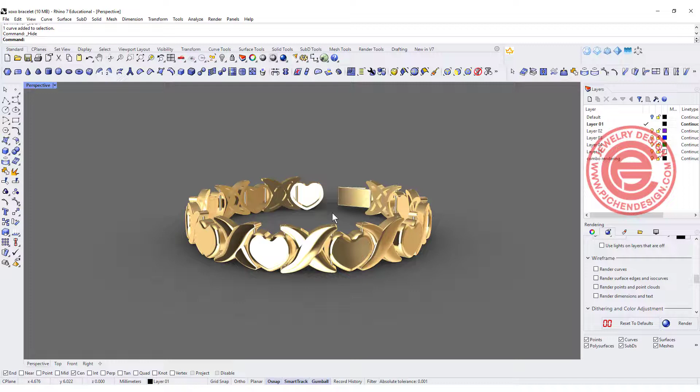Today we'd like to talk about how to make this XOXO bracelet and how to set it up for the hinge. Are you ready? Let's get started.

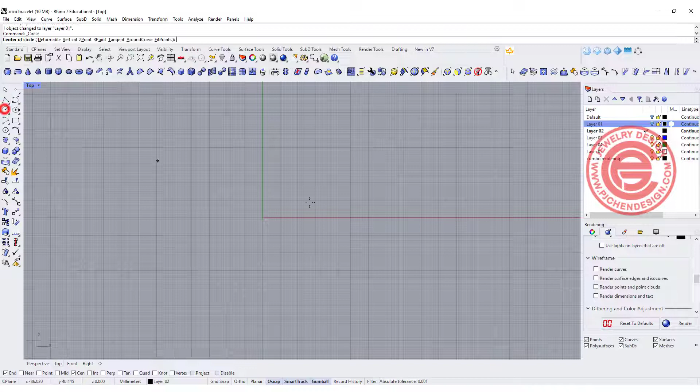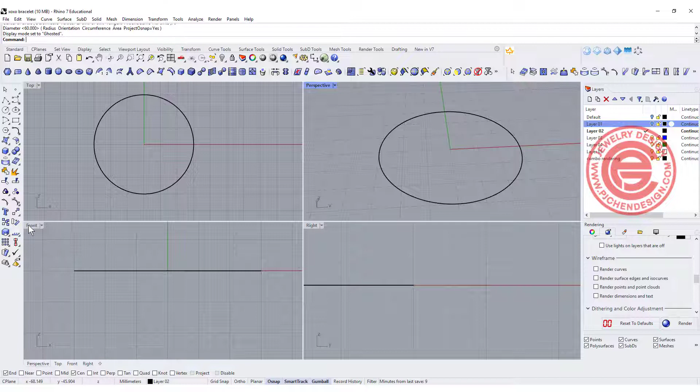So I'm going to come to the top view and draw a reference circle for what the end product size is going to be. I'll try a diameter of 60, which is a standard size for any bracelet. You can make it longer or shorter, but this is about the size we'd like to have, and from there you can model accordingly so it won't get too big or too small.

Let's start with our first element by giving a reference again. I'd like to snap right in the middle and see how big of a size I need. It could be really square by just holding shift for that X element, or it could be a rectangular shape, depending on what you like to do. So I'm going to do the square, and roughly it's about a little bit over 10 millimeters.

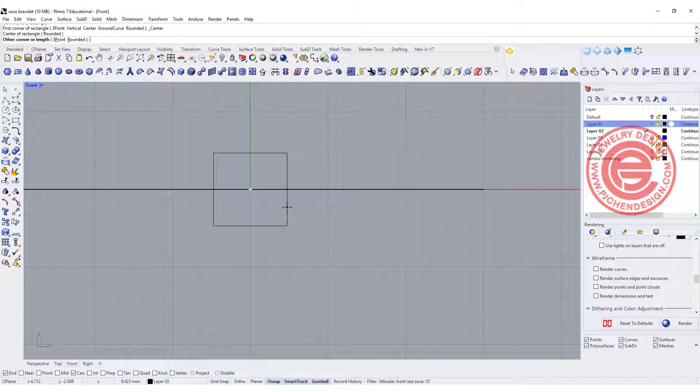I'm going to draw a mark right here from this point to this point. This is a reference for us, and if I have a circle or the other element, it will probably go from here to here. So this is where we want to draw the heart.

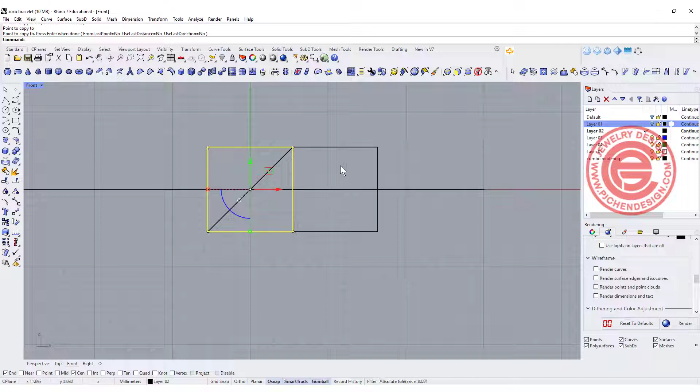So let's go ahead and draw the heart first. I'm going to use the curve, snapping into this endpoint and following with my near snap, following the shape. In the middle, we want it dipping a little bit like this. You can adjust it however you want the shape of the heart.

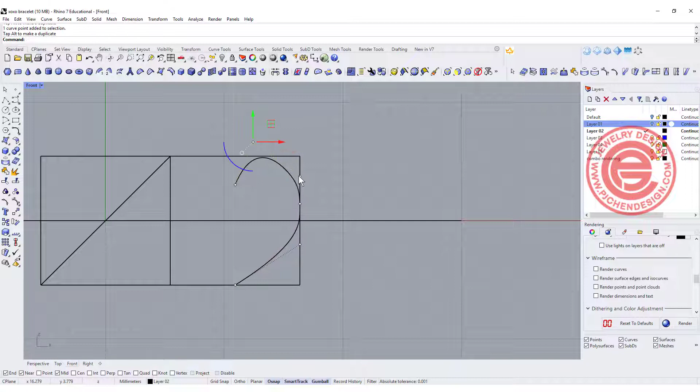This might be a bit too pointed, and we can adjust it later. This might be a little too pointed, so maybe I need one more point right there. So I'll go ahead and add one more control point, so I can edit this without changing too much of the steep curve.

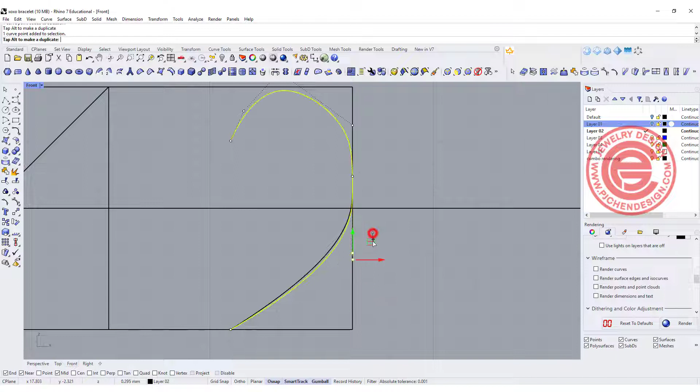Play around to find the shape that you like. We might still need to change it later because it actually needs to fit into the X shape there. All right, so that's one of it.

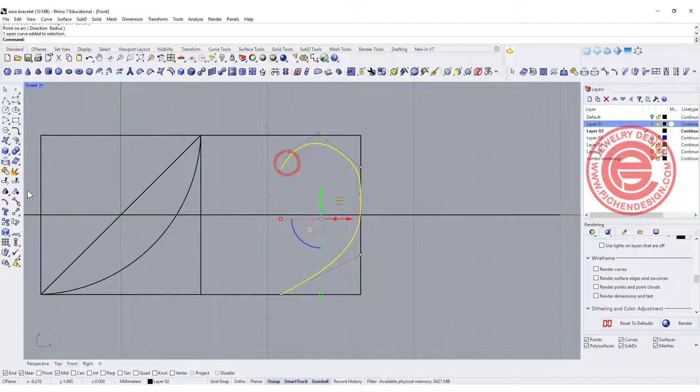For the shape right here, I'm just going to draw an arc, maybe go from here to here, something that looks like this. Actually I should draw on the other side, but that's just simply mirrored to the other side. Let me join this one as well.

Think about it: if we have this heart and it has to fit in there, it's kind of blocking the middle, so you won't get a nice fit there. So we need to adjust this one as well. We're going to rebuild this curve.

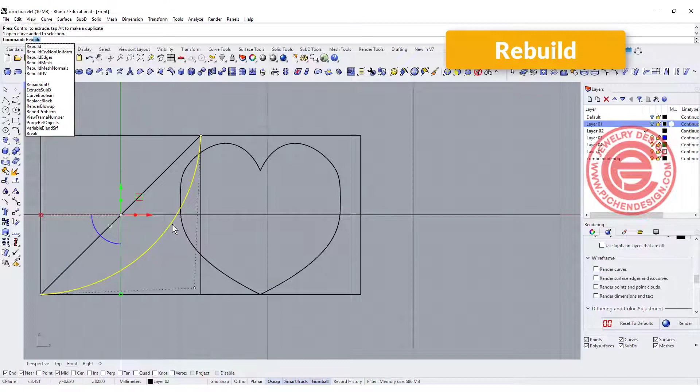We're going to rebuild into the 7 count, and now that we have those points, we can move them around something like this. So we'll still have the bump on the bottom, but it's kind of caving over there, which will be easier to fit in. This shape may not look as good though.

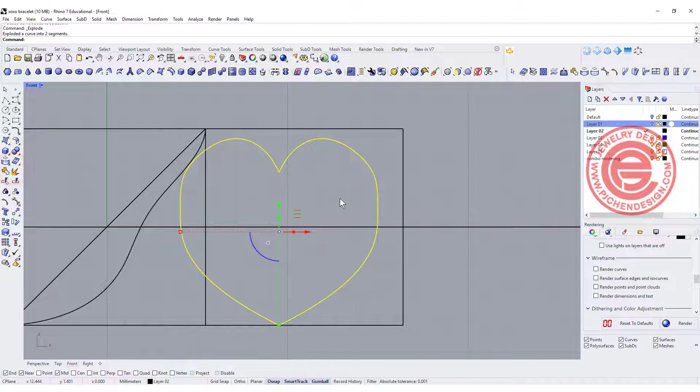Let me actually delete on the other side. We just need to find the best fit here. Maybe I want this one to be lower.

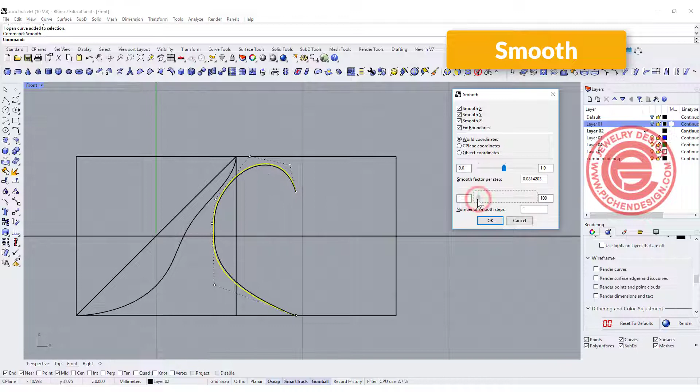And maybe I want to use a smooth command to make it a little bit rounder, like this. Okay, so we're going to do another test to see if that fits.

I'm going to rotate it and make sure copy equals yes, and rotate it 180 degrees to get our first element right there. Let's go ahead and join it.

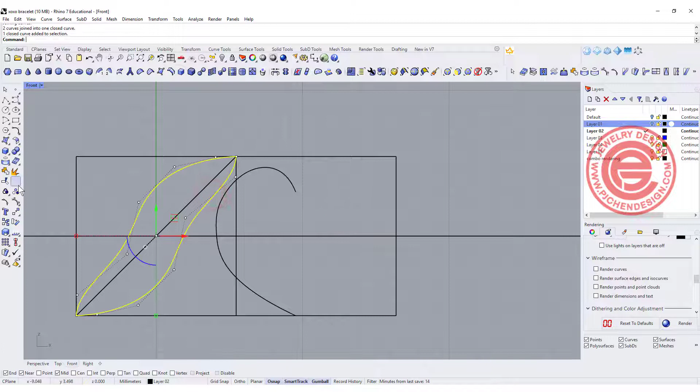We also want to round the edges a little bit, so let me round it with 0.5 millimeter here and 0.5 millimeter here. We're going to do another test to see if that heart is going to fit really well.

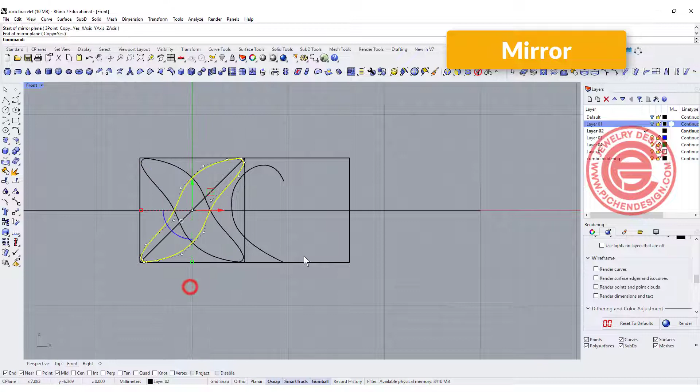So let's go do the mirror and bring it over here. Thinking about it, we're going to have a pin go through, and the pin will possibly be right there, so the heart needs to get in a little bit more.

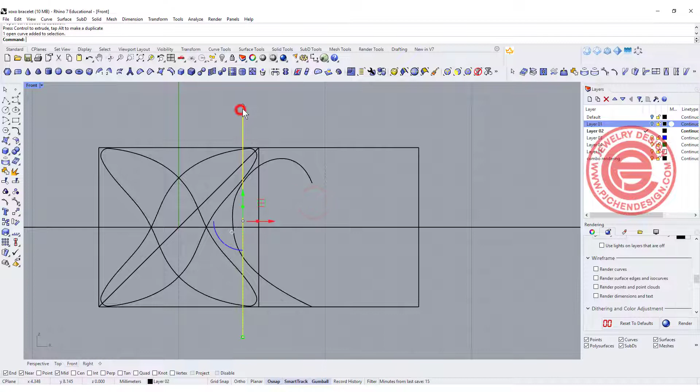So something like this will be the end. The pin itself, you might want to think about 0.7 millimeter. So let's give it a reference line. I'm going to have this line and offset for 0.4 millimeter. That will be the hole size, and also offset on the other side. And then let's just group those pieces.

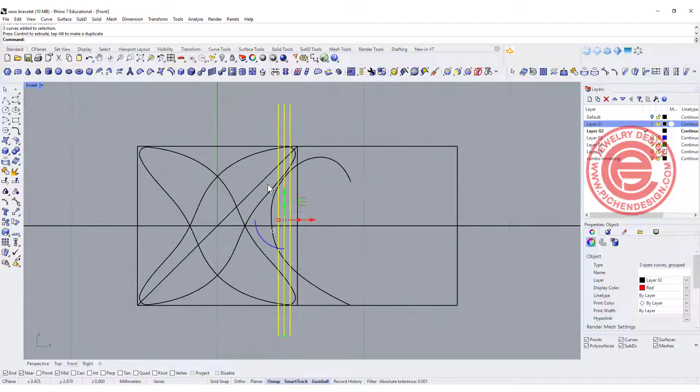All right. So let's change it into the red color, so it gives us an idea. Now this line might be too thin over there, so I might need to move it out here, but you do not want it to be too thin over there either. So maybe what we need to do on this one is the heart needs to move in a little bit more. By moving a little bit more, and this one we can move it here too.

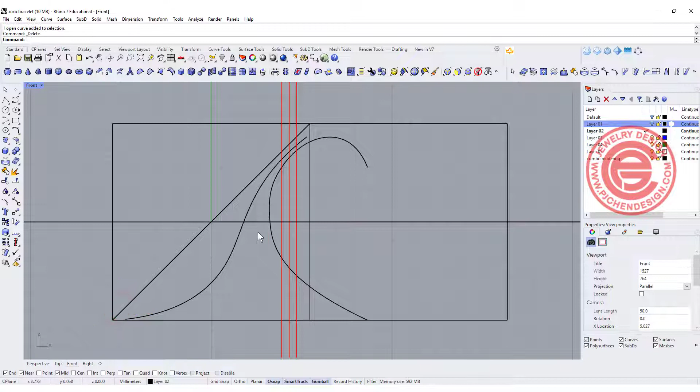You kind of see it's blocking there, so we will need to have this line move in even more like this. Okay, so now we got everything correct. The bottom one doesn't need to be moved. Let's delete this one, explode this one. Let's go ahead and delete those. And again, we want to use this one to rotate it with copy equal yes and flip it here.

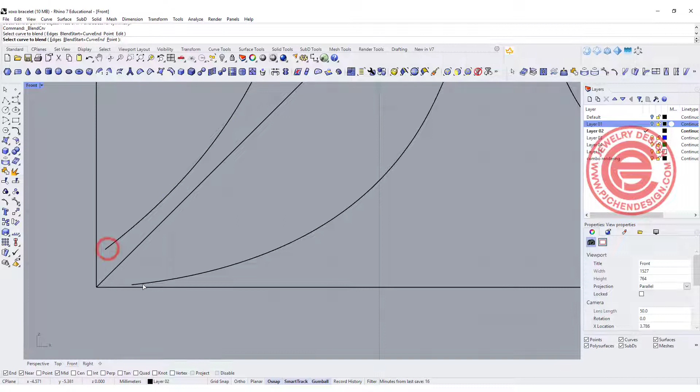All right, and now this one won't block. I can simply just blend the curve in between here and here, and also in between here and here. All right, so now this is a better fit there. Let's go ahead and use the mirror, and we want to mirror from here to here. All right, double make sure that will fit.

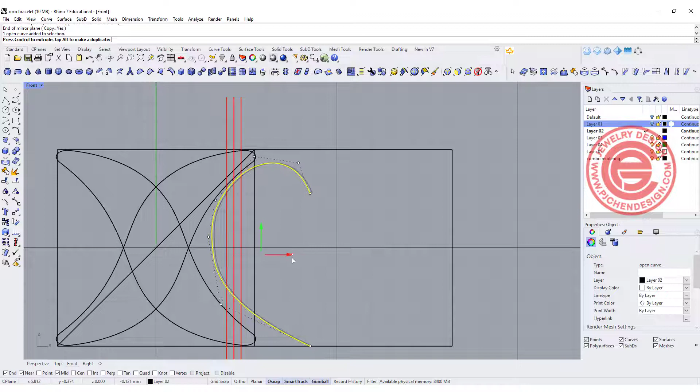Right, so you want to make sure that you have enough metal. You do not want this hanging outside too much. You also need to leave a little bit of space right here, because the space right here allows it to bend, right? So you cannot have it 100% touching like this. Then your pin probably will break easily.

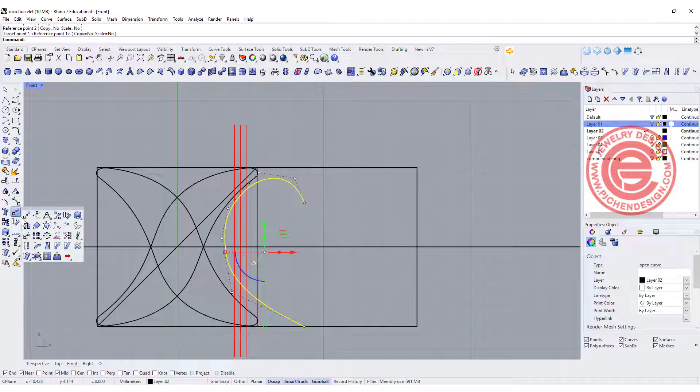Okay, so now while we have this, let's go ahead and finish the heart. We want this heart to be mirrored to the other side, starting from here to here. And we want to give filleted edges here. On the top, I might want to try 0.5 millimeter. On the bottom here, let's try something bigger, maybe 2, to get it really nice and rounded on the bottom. Okay, so now this is our basic shape. We can create the solid for it.

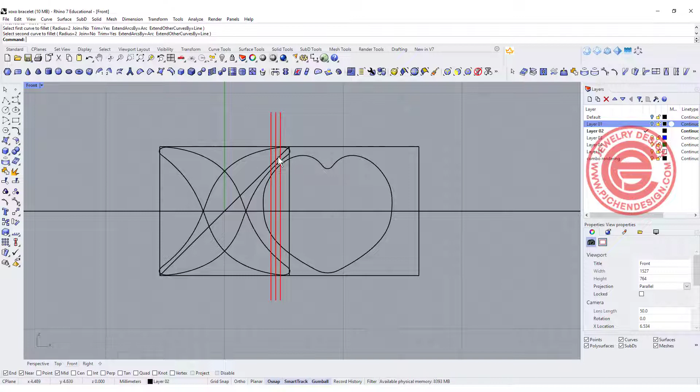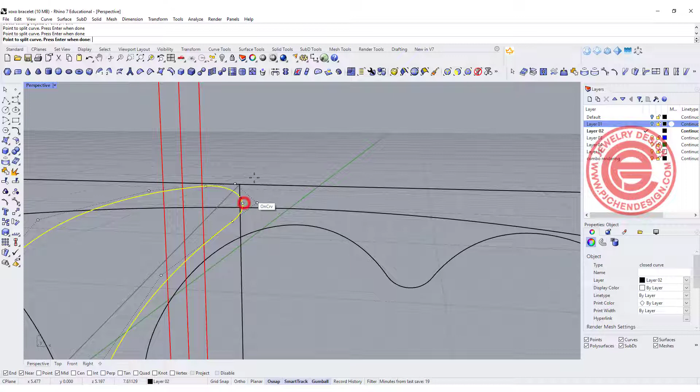All right, so to make this into a perfect solid, I'm going to split with the point roughly about here, another one roughly about here. Okay, and so now we got our two rails here. We need to create the cross section. I'm going to use the arc tool and snap roughly about here and here. Then you want to come into the top view, holding the shift, so then you get this really bumpy shape here.

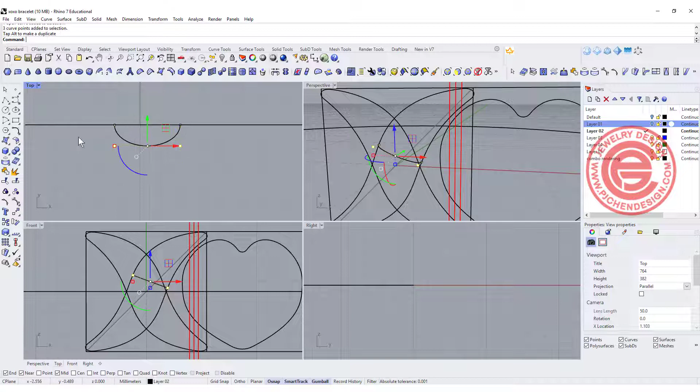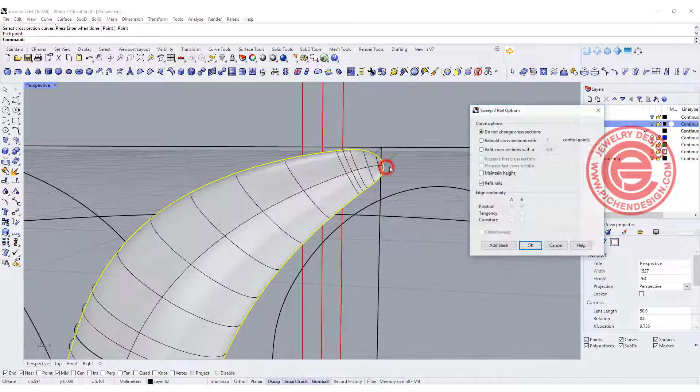Now if this is too tall for you, you can always go a little bit lower by dragging those 3 control points and moving them down. All right, so that's creating the surface. We are going to use the sweep 2 rails, rail 1, rail 2, and you got the endpoint right here. And then you pick up this cross section and you click on the point again and come into this endpoint. All right, so that's how you get this one, right?

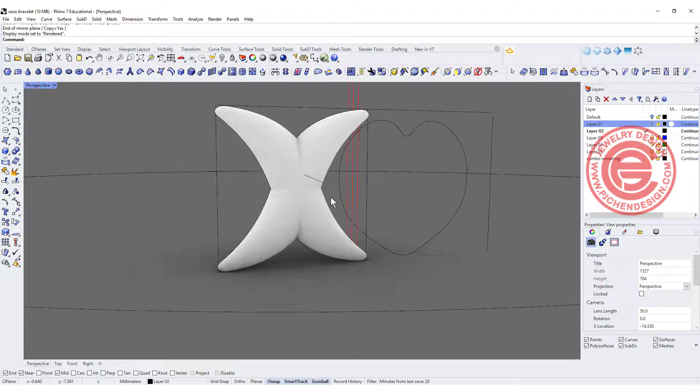Now we have this surface and we want to mirror this one to the other side, and it's going to be like this, right? Now notice that two of them are the same height. So if you look at the render view, it's going to look like this. It's pretty ugly. So one of them we are going to make a little bit lower by using 1D scale. So I'm going to snap any point and just bring it down a little bit like this. So you will have this X shape there. So we're going to pick up the curve back and let's join it.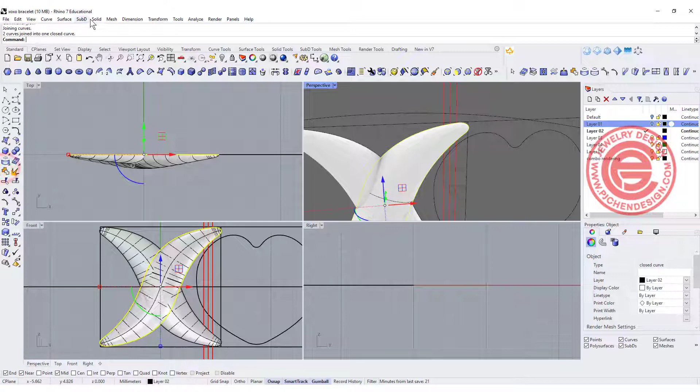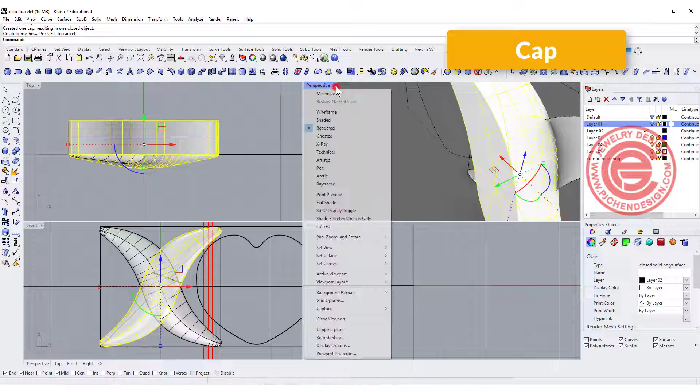And because we need to make it into a solid, I'm going to use the surface command extrude curve straight, and set how tall you want it to be. So roughly it's about 2.5 millimeter. I'm going to set the height over there. So now we have this one. Let's go ahead and join those two surfaces and use the command cap to close it. So now this one is a solid, right?

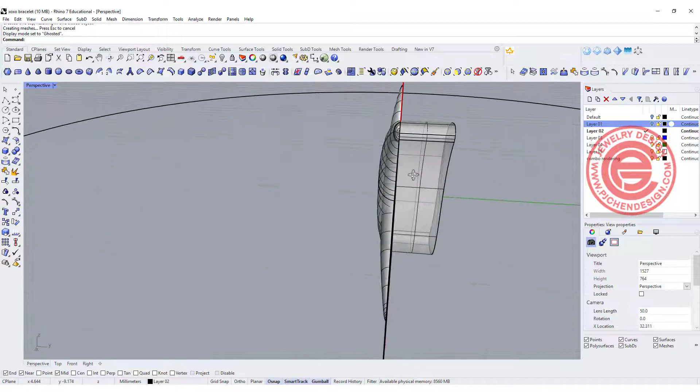But if it is a bracelet and it is solid and it is gold, it's going to cost you a lot of money, and it's pretty heavy. When it is heavy, it tends to flip while you're wearing it. So we actually need to make it hollow. Two ways you can make it hollow. One, you can use the shell command, but this might be too tight because of this tiny radius there. Let's give it a try. We want to use the shell command, and we want to keep the wall thickness at maybe 0.7 millimeter, and then I click on this base. All right.

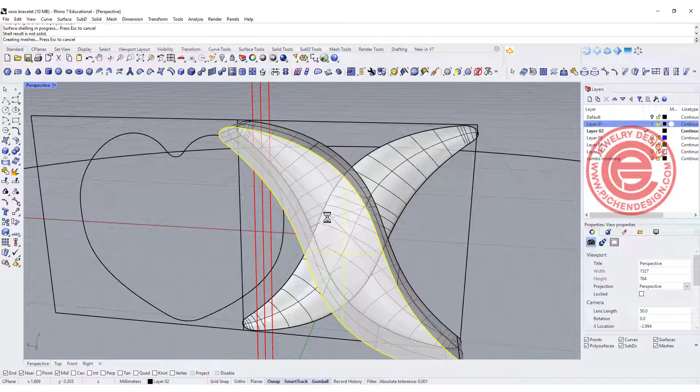So as you can see, the result is not solid like what I say. Maybe this is too tight there. All right. To solve this issue, what we can do is we can create this solid, and just scale it 3D down, and then tilt it a little bit and make it longer, for example, coming out like this, and then you can Boolean difference.

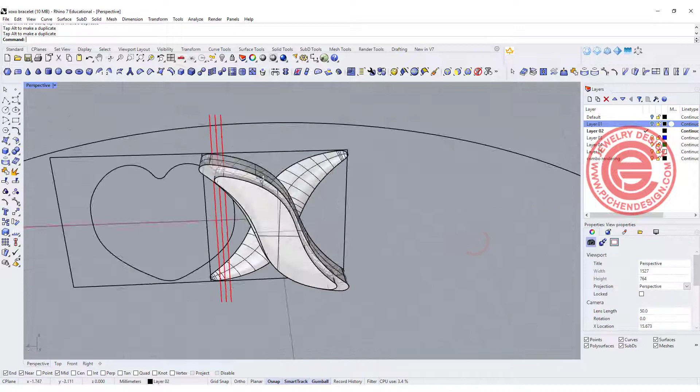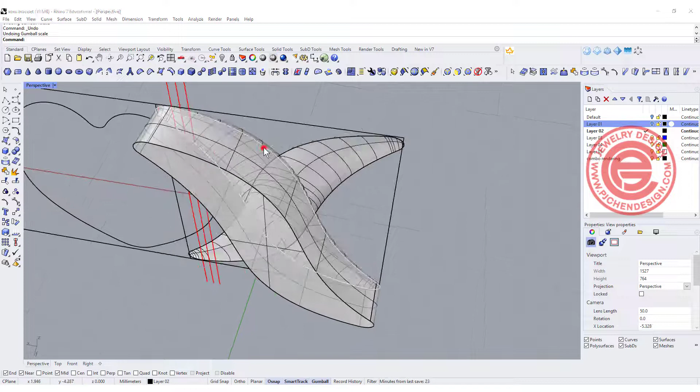But in that case, you can see the thickness in between the outer and the inside is not consistent, right? It keeps the shape there, but it's not consistent all the way. I don't like it. All right, so the way I think it's better to do is we are going to pick up this curve over there, and I'm actually going to offset for the certain thickness I want. So I'm gonna stay with the 0.7 millimeter for the interior.

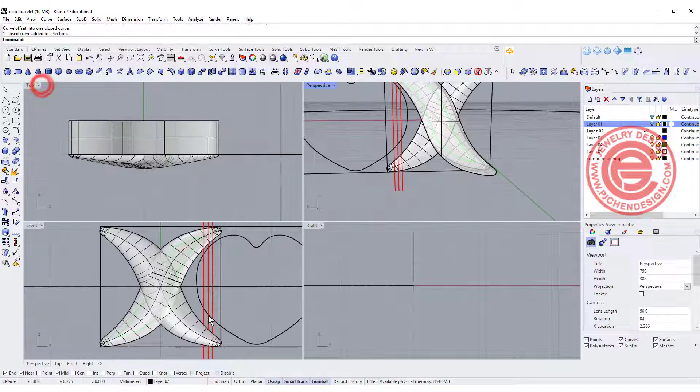So once we get this one, let me turn it into the green color here. So now that green line over there is what we are going to extrude. But look at this, maybe red line is easier to see. So look at this line, it's so sharp. Anything that you want to consider casting, you want to avoid the sharp point. So we are going to give it a fillet. For something small, let's try 0.3 here.

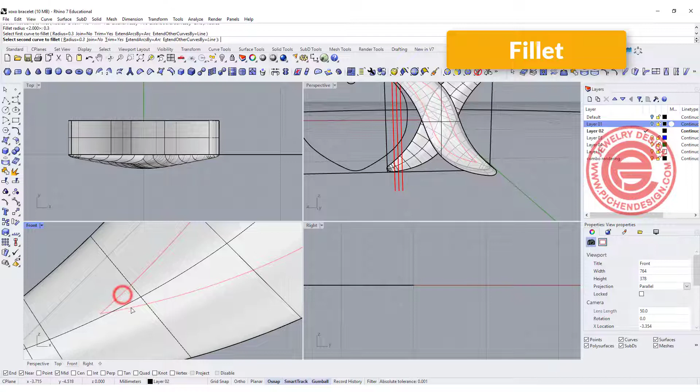So round it over there. And we want to do 0.3 as well. So round it over there. It's also good for us to do it this way, because that completely avoids this area that we are going to punch the hole, and so that will make it more solid over there structure-wise.

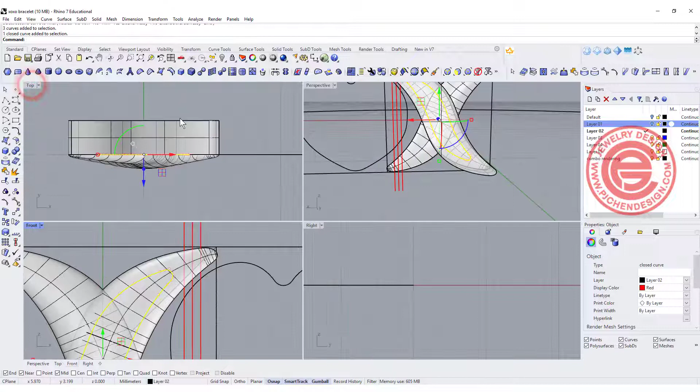All right, so this one I'm just going to extrude it straight with the solid, and now I have something like this. Let's give it a try. Boolean difference, this guy out of this guy. All right, so see, nice and beautiful and even, and we have a very solid over here. Okay, so now we are going to do the same thing to the other side.

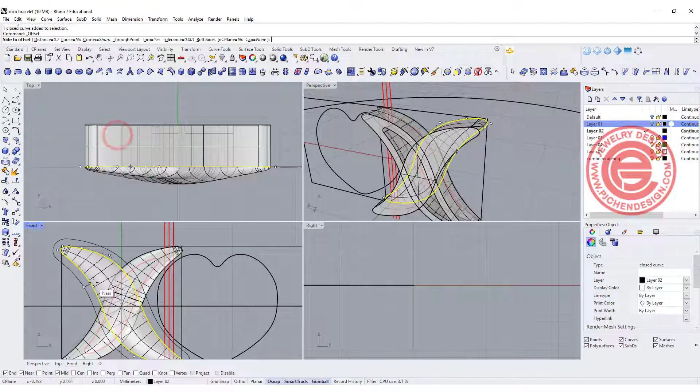Let's pick up the curve over here, and let's go ahead to surface, extrude curve straight for the same height, 2 millimeter, and then join them. After that, use the cap command to make it solid, and then we need to cut out the middle part. So pick up the original curve, offset for 0.7 millimeter. At the same time, we are going to round off this corner and this corner.

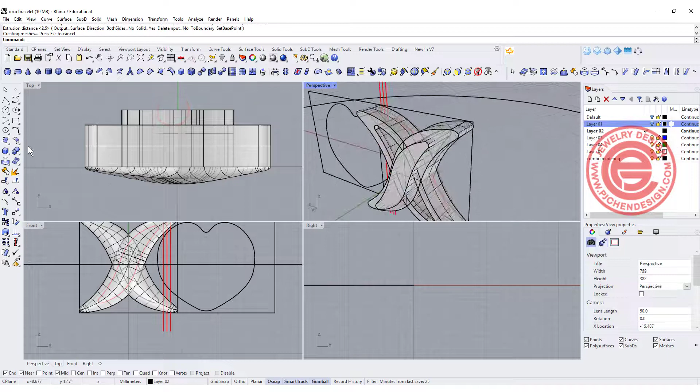Okay, so with the new curve that we have, go ahead to extrude planar curve straight. So now you're going to use the Boolean difference, this one and this one. All right, so now I'm looking at this. You can Boolean split this one out if you want to. For the demonstration, I'm going to just leave it there.

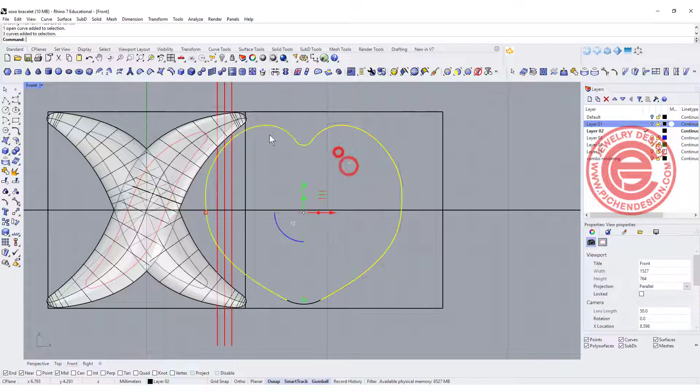Let's talk about the heart here. So now to make the heart, I'm going to just pick up all this heart curve here and join together. Simply just extrude them. So I'm gonna go to solid, extrude planar curve, go maybe a little bit taller, and actually I want to move it down a little bit like this, so they are roughly the same height.

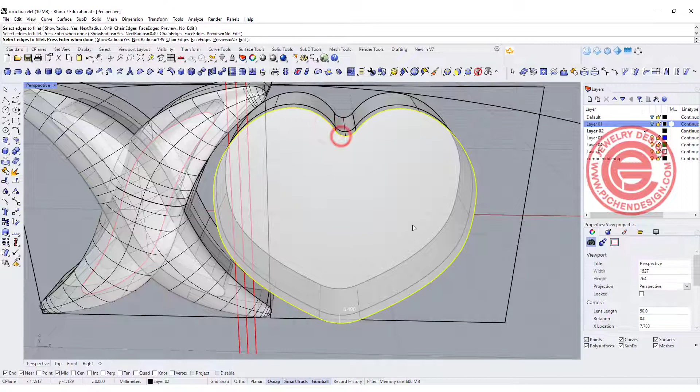And then remember, this one is like 0.5 millimeter, so I might be okay to get away with just smaller than 0.5 millimeter there for the fillet edges. So I'm going to try 0.49 millimeter, and let's try 0.49 for all of this. Okay, pretty. And we are going to use a shell command on this one to see if that works.

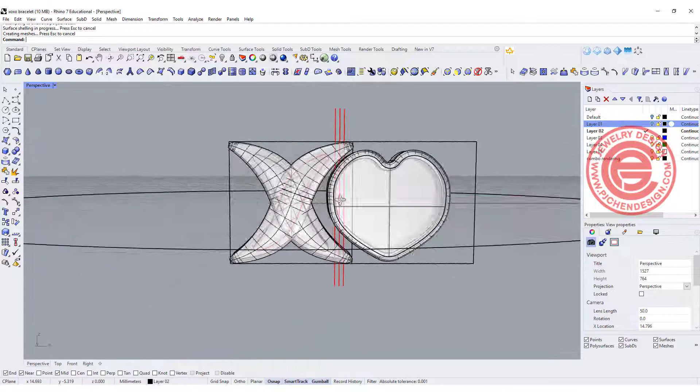If not, we can always go back with the same way, because this doesn't have a really tight area, so this one worked better. Now I'm looking at it, my heart is a little bit shaky on the side, but that's okay for this demonstration. Okay, so now we have this. We need to punch the hole there.

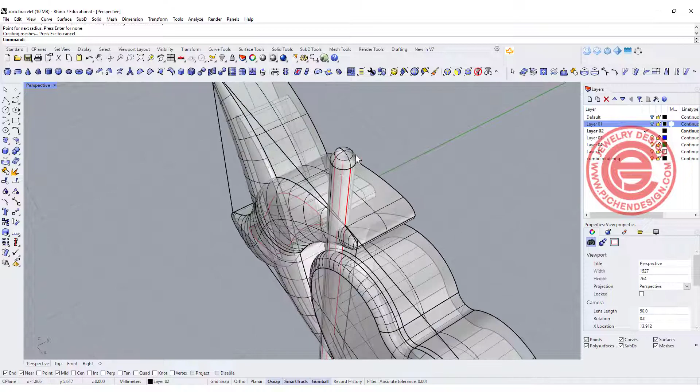I'm simply just going to ungroup those guys, and then one of them, I'm going to pipe it. The radius for 0.4 millimeter. That's roughly about 20 gauge wire there. This is going to punch the hole, and the wire itself is going to be 0.7 millimeter, just a little bit smaller. All right, so I'm going to move this one lower, roughly right in the center like this.

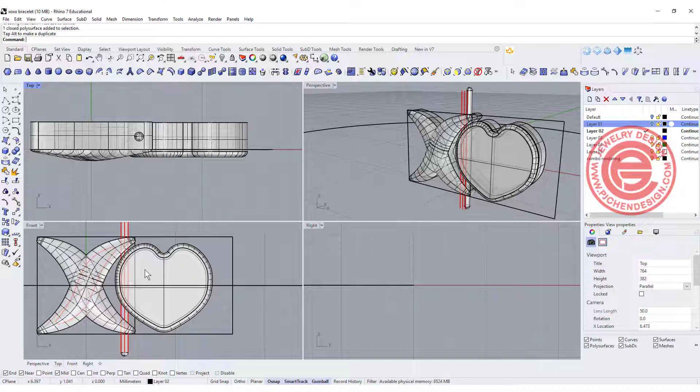And if you want the hole to be a little bit bigger, so you can put in the 20 gauge wire, that will be fine too. All right, so now after fine-tuning this one, for the rendering, I do need a pin there, so I'm gonna make a copy and hide one of them first. So I'm going to use a Boolean split, and we are going to have this one be split by this one and this one.

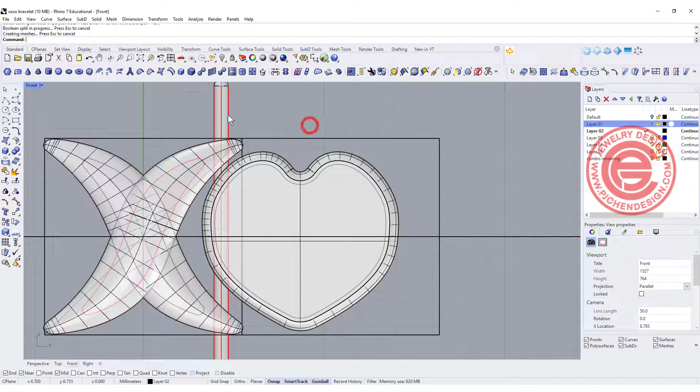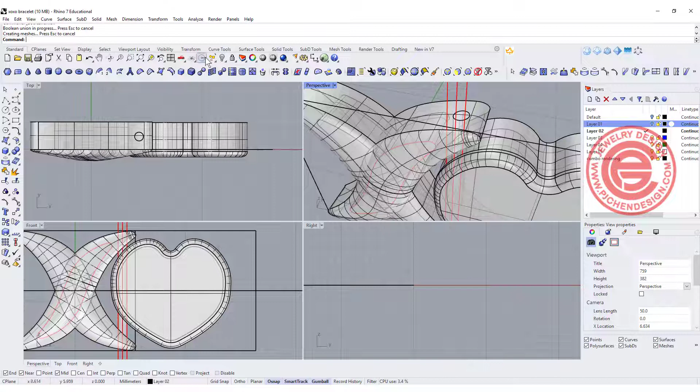Okay, so I can get rid of this one here, and we're actually going to join this and this together. Oh, I'm sorry, going to Boolean union back. All right, so that way we'll have a pin there. I'm going to turn it on. The original one, let me turn this into the red color.

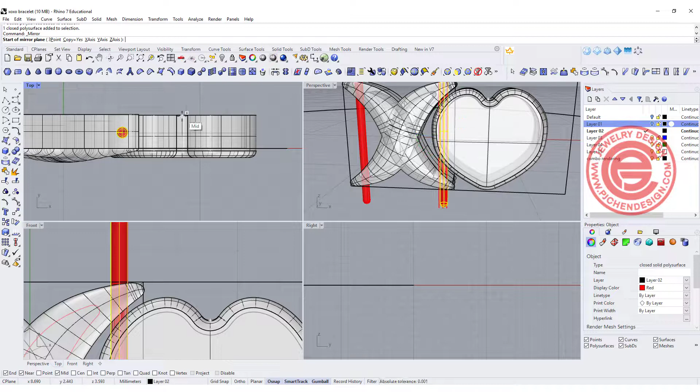All right, so for punching the hole, we need to have this one on the other side. So let's go ahead and mirror that one with the center there, so that way we can punch the hole. We also need the hole punching on the other side of the heart, so I'm going to mirror with the midpoint right here, and then that will be the hole we are going to punch on those two elements.

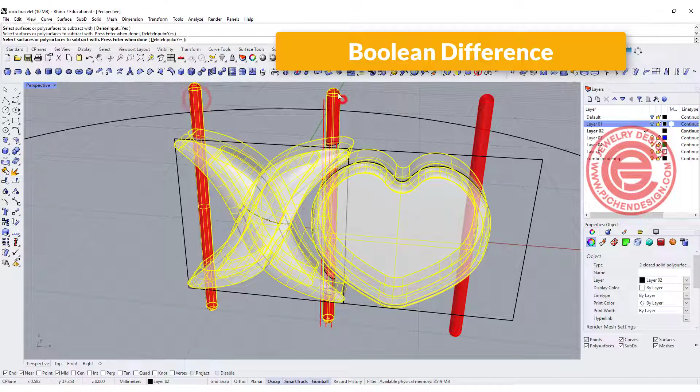So first of all, let me Boolean this one first. And the second thing is we are going to use those two and Boolean difference out of those bars. All right, so now you see we have the hole punching. The guy over here was the pin that we have. Now I'm going to turn this one into the red color.

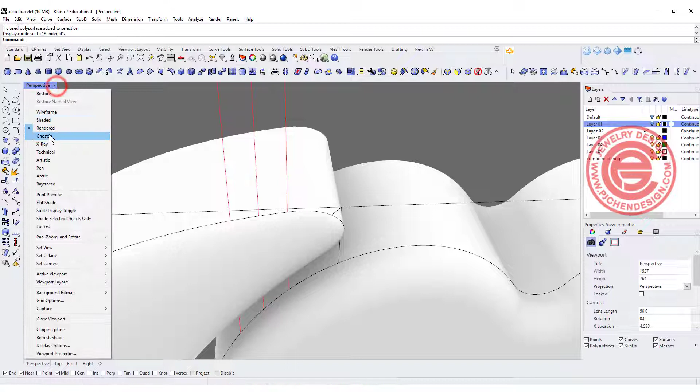And for the better rendering, if you see the rendering like this, it's like nothing there, right? So to make the rendering better, you actually can chamfer or fillet the edges. And we want something small, like 0.1 millimeter on the edge of the rod that is going in there. So now if you take a look at the render view, you're going to see it feel like there's something in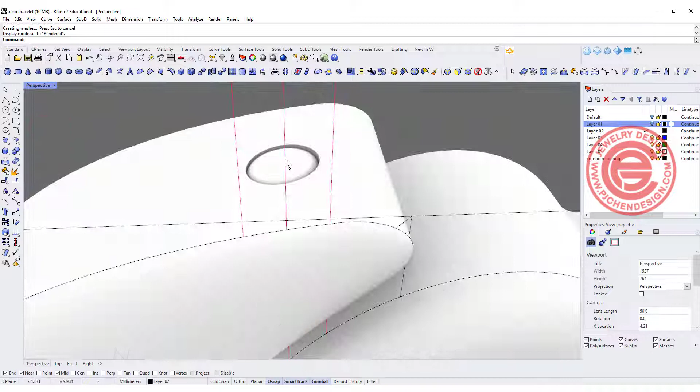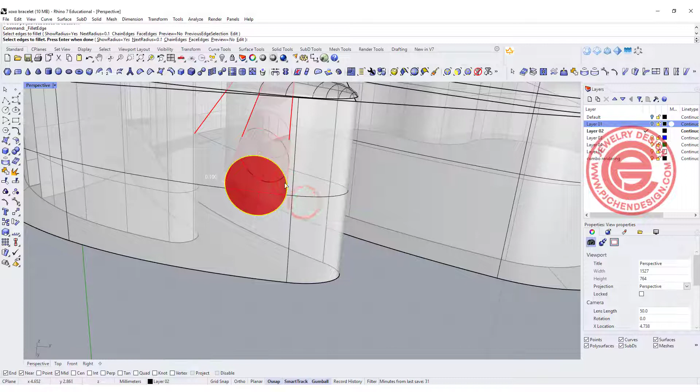there. If you want it to look nicer, you can even fillet the edges on this one as well. So in the rendering, it will look like there's a pin there. So we're going to do that on these edges as well, and also the other edges, so they both have the fillet there. Let's do here.

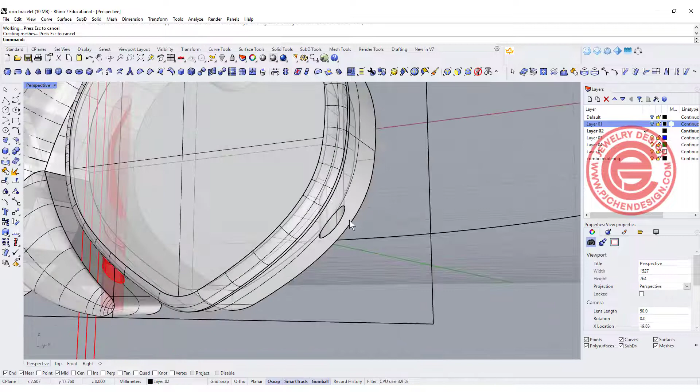Some people will ask me, do you actually need to do the fillet on a lot of things? Ideally, yes, because it will just look better on the render. But if the render is not the main thing you are doing, you just want a casting, and this fillet is tiny, it actually doesn't make much of a difference on the casting. So no, in that case, you don't. But if the fillet is part of the design, then yes, you need to do that.

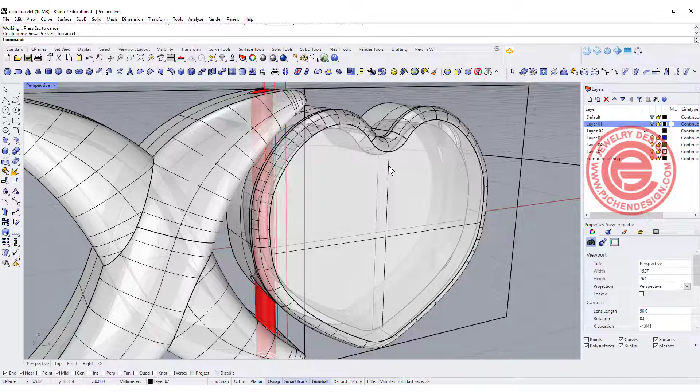It's like this puffy look, the big fillet there. It's hard to have a jeweler shape them all in the same way. So in that case, yes, you need to fillet that. I hope that explains some of the questions that you may have.

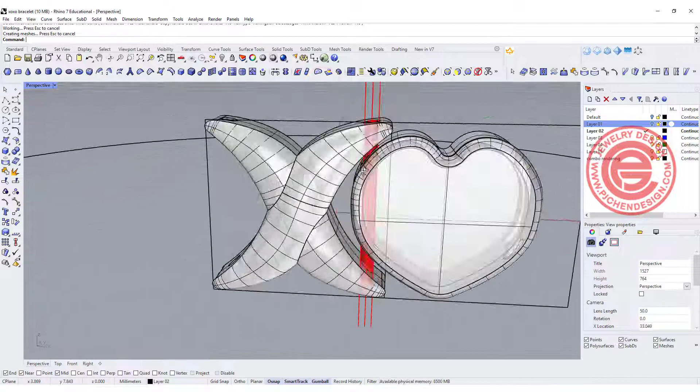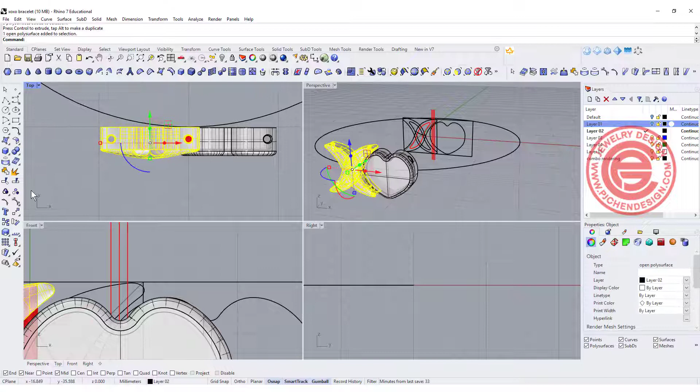All right, so now if you are going to stop here and cast, that will be fine. But if you are going to do the rendering, you probably need to have them flow into this one nicely. So what we want to do is pick up this element right there, and bring it to the front. And you might want to angle it. So I'm going to angle it something like this, move with copy equal no, and rotate it like this way. And before I rotate the other one, I need to mirror the pin there.

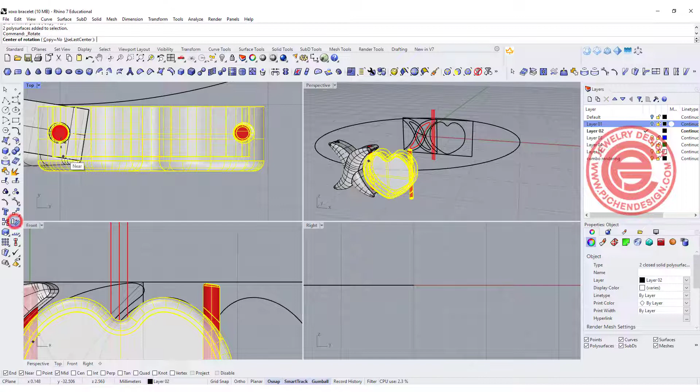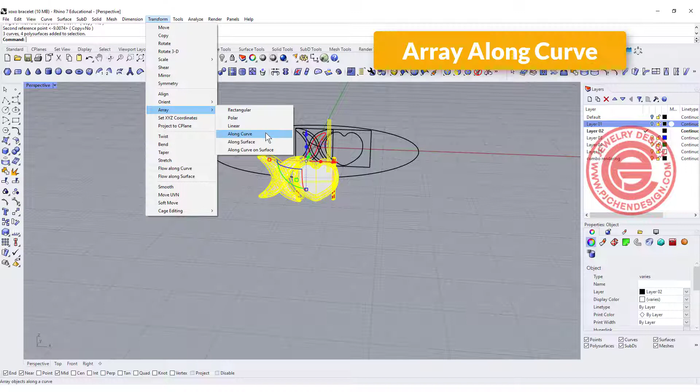Okay, so for this one, I'm going to rotate it somewhere in the middle, something like this. Okay, so all we need to do is pick up all of this, and we are going to array. Coming to Transform, you have Array Along Curve, and we're going to array along the base curve. How many, I don't really know.

Let's give it a try for 10, and it is not touching, so let's give it a try for 11, and it's much better, so maybe 12. Okay, so 12 is too much, 11 is not enough. So I'm going to stay with 11 and make sure my history is on.

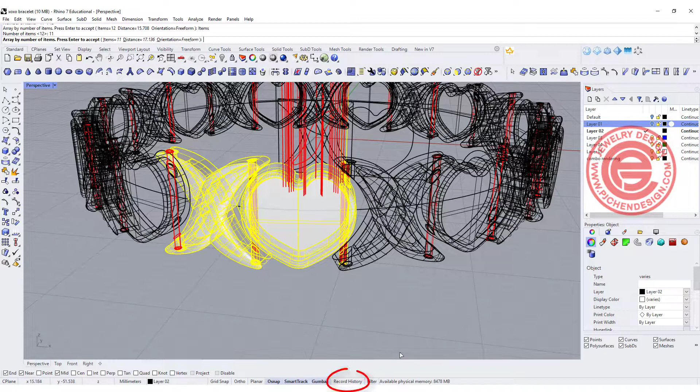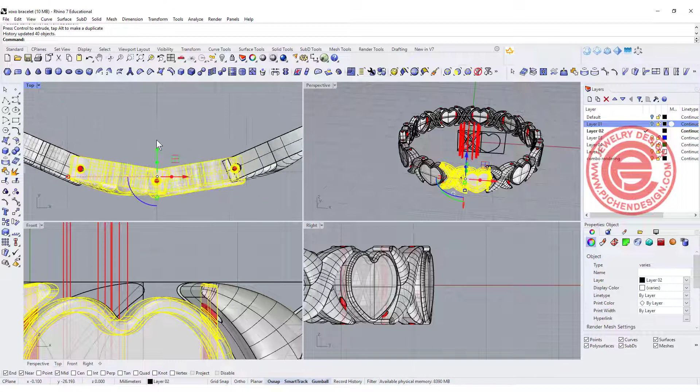So once I have this, because the history is on, what I can do is pick up the original object that I have for the array, and move them in just a little bit, right? So it will line up the hole a little bit better there, because we used the last element for that. Okay, and so that will give you a better rendering look.

So this one I also have done, doing a box over here for the clasp.